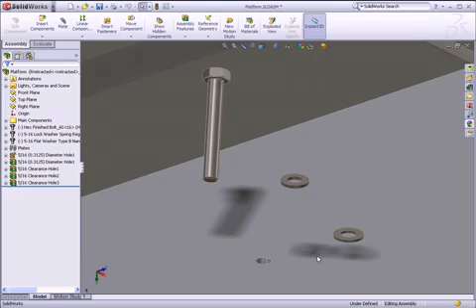Hardware is something most engineers and designers have to work with at some point in their designs. It's often more than just a couple pieces, and each piece usually takes a couple mates to locate within the assembly. Now, one little shortcut you can use is something called multiple mate mode. You can activate it by clicking the mate icon and then pressing the multiple mate mode icon here.

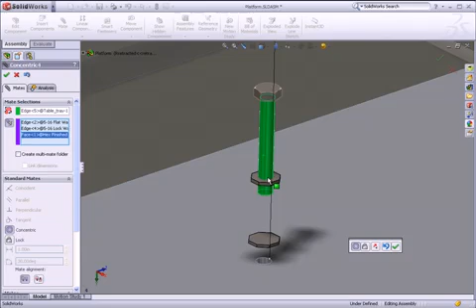This mode lets you select a common reference, such as a hole, and the rest of the selections will be made concentric. This saves a little time, but I'd still have to make the flat faces coincident. And if there are a lot of holes that need this hardware stack up, this would still leave quite a few mates to add. Instead of mating each piece of hardware in this stack up to each hole, how about instead making the stack up its own assembly? That way each stack up would only need to be mated once.

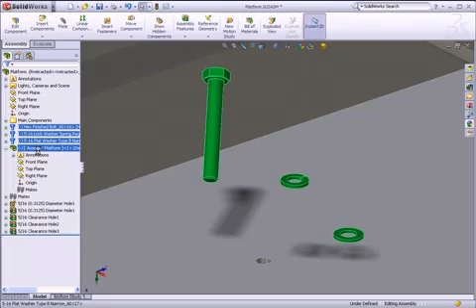Here's a quick trick to add these to a new assembly. I can right-click on the top of the assembly tree and select Insert New Subassembly. This adds an empty subassembly with its own reference planes and origin, but no components. To add the hardware, I can select it by holding down the control button, and all I have to do is drag them into the empty subassembly. This demotes them from the main assembly and places them in their own subassembly.

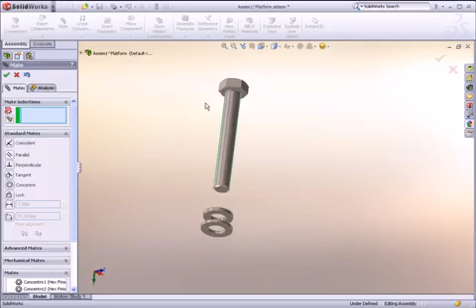I can right-click and save this as its own external assembly file, but for now, I'll just open it in its own window. I'll again use multiple mate mode and make them all concentric. I'll finish by making the flat faces coincident. At this point, I'll press Save and return to the main assembly.

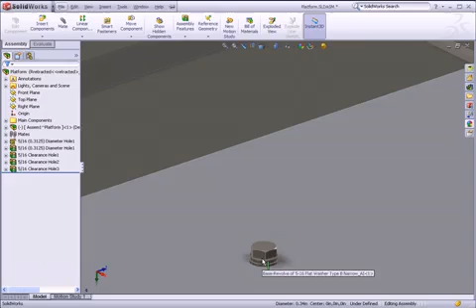With the hardware all mated together in its own subassembly, all I have to do is mate the entire stack up with each hole. In case you're not familiar with Smart Mates, another time saver here is that you can hold down the Alt key, then select the circular edge here, and simply drag it over the edge of the hole. You'll see it snap into place, and when I release my mouse button, the Smart Mate technique adds both the concentric and coincident mates needed to locate the entire stack up.

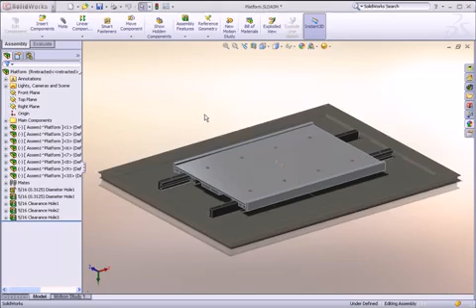With all of the hardware added in the assembly, it makes drawing creation easy. If for any reason you want to put the hardware and their corresponding mates back into the main assembly, all you have to do is right-click and select Dissolve Subassembly.